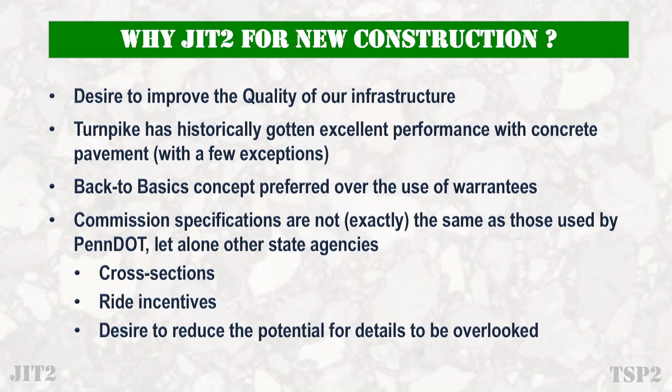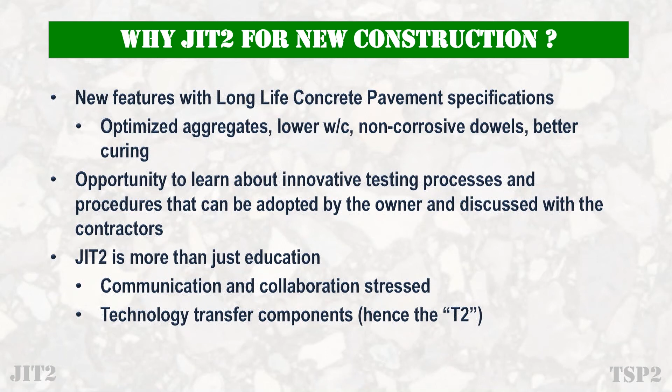Next, when the Pennsylvania Turnpike bid a new section of our Southern Beltway project that's located just south of Pittsburgh, we included a special provision for long life concrete. The Turnpike Commission felt that just-in-time training sessions provided an excellent opportunity to define the LLCP concept with all the contractor and inspection personnel involved. Topics such as concrete mixtures utilizing optimized aggregate gradations, the use of non-corrosive dowel bars, and lower water cement ratio factors, along with AASHTO T318 microwave testing to verify water cement ratios, were all new components to the long life concrete process.

First question that comes into play is whether the department, the Turnpike, wants to use just-in-time training. It's actually included in the contract when it is selected, and we have special provisions for both new construction and for pavement preservation. The special provision is included in the contract, and if the contract calls for just-in-time training, contractors bid that type of work, and they get reimbursed 75% when the first session is done and 25% when the last session is done. Special provisions stipulate that this training must be done within 1 month of when paving commences.

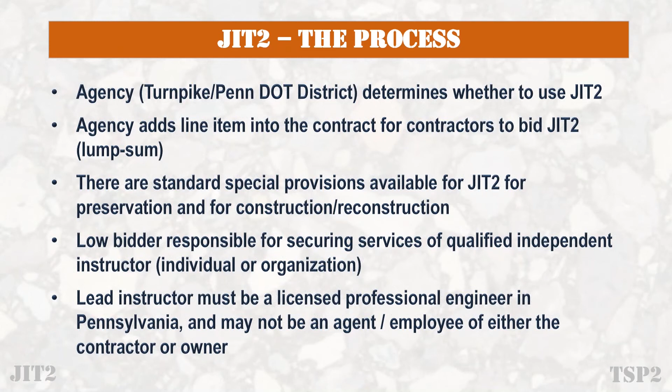The low bidder on the project is responsible for securing the services of a qualified independent instructor. This is not sole source type contracting, but the special provision does call for the lead instructor to be a licensed professional engineer in Pennsylvania and not an employee of either the contractor or owner or any of their consultants that are working specifically on that project.

For us to be successful in conducting a just-in-time training session, the first thing that we do once an agreement is reached is visit the contractor at their location. In most cases it's here in Pennsylvania, but we have gone out of state to sit down and talk with the contractor, find out what kind of operations they have, what their equipment is. Are they going to be paving with DBI, with a dowel bar inserter, or staked dowels? So we want to get as familiar as possible with the contractor, with their QC plans and how they plan on operating.

We also feel it's very important for us to physically go out to the project, to visit the project site and the concrete plant, because one of the things that we heard loud and clear from the owners is they do not want a cookie cutter type presentation. Now, obviously, the standards and specifications from project to project often are very similar, but there are some unique aspects for each of the different projects. The staging is different, MPT could be different, and so we do not have cookie cutter type presentations; it is mostly very project specific.

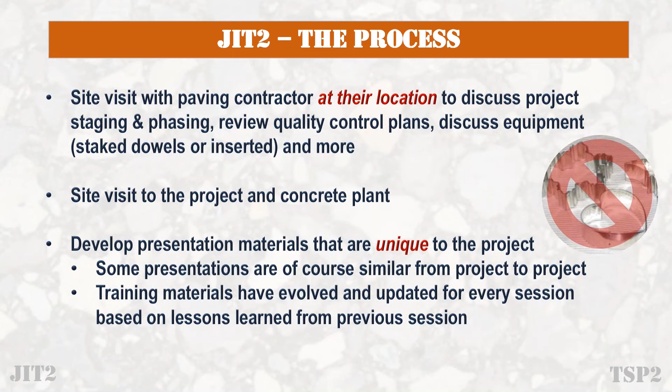One of the other contract stipulations is that the presentation, once we gather all that information, once we've met with the contractor, once we've met with the owner, we have to have the presentation in their hands 30 days in advance of when training takes place.

And one of the other rules is that the training has to be conducted within 5 miles of the project. Contractor is out of state, the training's got to be within proximity of the project. And the location of the training could be a hotel, fire hall, a house of worship, golf course, or a contractor's training room. And I spell all those out not as hypotheticals, because we've actually done training at each of those different locations.

The training for new construction is 6 to 8 hours. And because we've got a 6 to 8 hour training class, and because a lot of the training that we do is in very remote areas, we didn't want to lose the audience, have them go off for lunch, come back an hour and a half later. So we provide meals, we bring those on in.

And the real good thing that it does when we go that route, it allows for sidebarring to continue. There's people that are a little bit shy, timid about asking a question in front of 30 people. That usually offers the opportunity for those folks to ask some questions that they would not be comfortable asking in front of a large group.

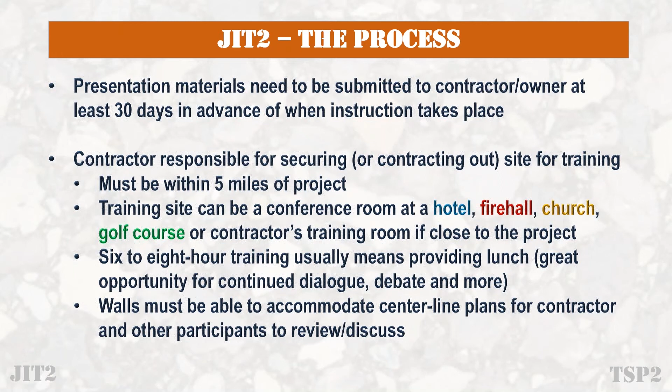And this is really a working type session, because these are project by project specific training. We've got the walls plastered with centerline plans, and we go through those, and the contractor explains how the project is going to get built.

Chris? Just-in-time training sessions are conducted prior to the start of any new construction or repair activities that are performed on the job site. The initial just-in-time training sessions range from an average of 6 to 8 hours in length and are held approximately 1 month prior to the start of work. A second 1 to 2 hour training session for follow-up issues is held generally a week or so prior to the start of the construction.

A just-in-time training session is then held as a conclusion once construction has begun, usually a week to 2 weeks after construction has initialized. And at that time, a review is done to determine what issues were encountered and if there are any ways we can improve the training for future sessions.

A wide variety of topics are covered in the training sessions, such as are noted on the slide: concrete paving basics, long life concrete paving concepts, best practices, quality control, project documentation and software protocol, and safety, which is always a paramount concern for all of our construction projects.

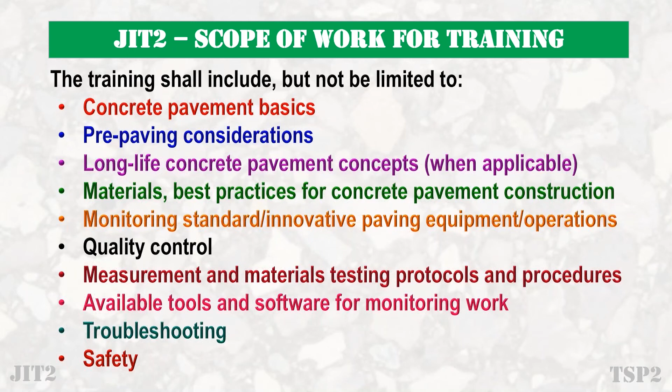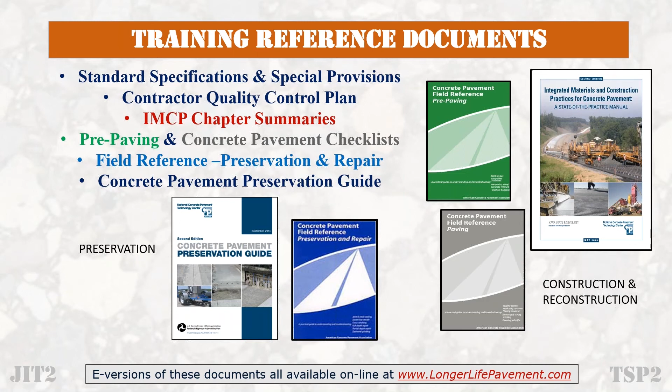I have a tendency, for those that do know me, to sometimes stray and go off on a tangent when we do the just-in-time training. One big rule is that regardless of what is said by the trainers, the contract documents rule. I mentioned the documents previously on the previous page. We provide those for all the attendees.

We also have in the handouts some key special provisions. For example, the Turnpike has a ride specification that differs from that of the department, and we talk about that. So we put those type documents in the manual. But again, the contract documents rule. Sometimes we've got new specifications that we know are coming down the road that aren't part of the contract, but they're getting implemented and incorporated into a special provision or into the new specifications

for a reason. A lot of times those are based on best practices, and we try to identify that this is not part of the contract, but it doesn't keep us from sharing with the audience best practices, either those that are used elsewhere in the state or from other locations across the country.

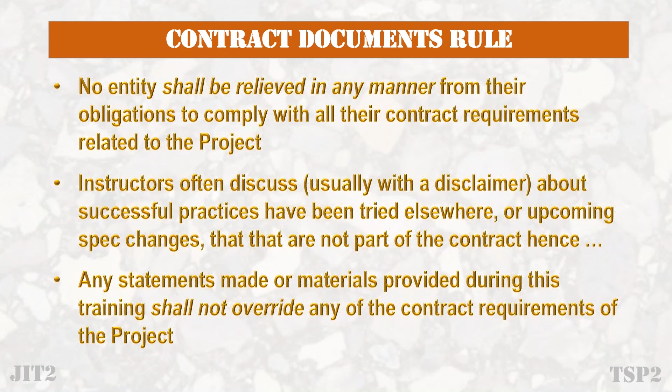The folks that participate in the just-in-time training, we typically have about 35 to 40 attendees. The entire work crew: the superintendent, the foreman, the finishers, the paver mechanic, the concrete plant technician. Those are usually all paving contractor. The paving contractor usually subs the work to a subcontractor, so we do have the sawing and sealing representatives also participate.

And you may ask, well, what's the purpose of having the material suppliers, the cement supplier, the concrete producers, the aggregate suppliers, etc.? They usually don't have the opportunity to be out on a project, but we all feel it was very important to have these people participate. They get to learn and know what it takes to put together a concrete pavement project. They also get an understanding of how time critical some of the delivery of the material is.

A lot of concrete paving is stop and start. There's a spurt of 3 or 4 days of paving and then 2 weeks of no paving. So it's real important for them to have a good feel and a good appreciation for what goes into building a project. The surveyors, people that are testing the equipment, testing materials, any other subcontractors and key people.

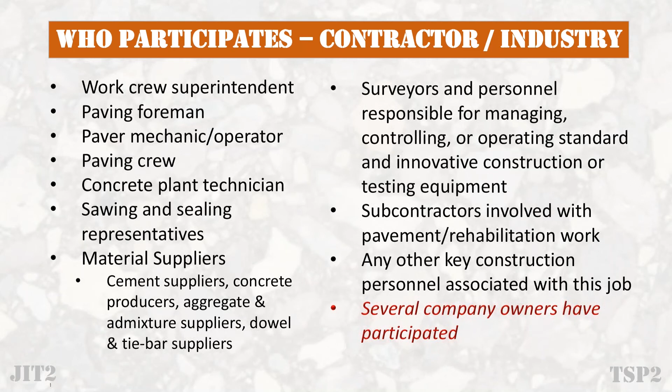And the buy-in that we're getting from the industry side, we've had several company owners participate for the entire session and also contribute and add their comments and observations. I think it's really important, by them showing that they're there and participating, it sends a strong message to their workforce that this is important and something that we need to take seriously. Chris? In order for the just-in-time training to be successful, participation by agency and Department of Transportation representatives

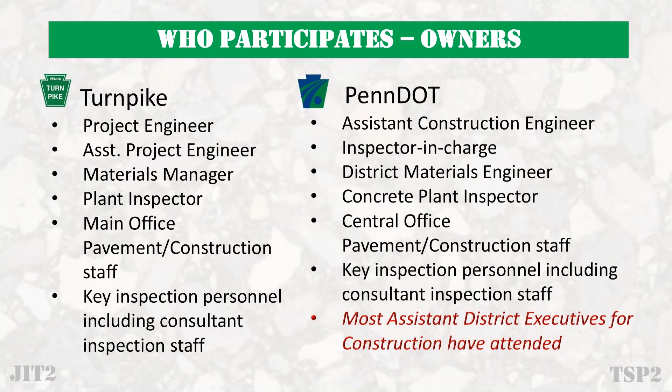is critical. Attendees from these organizations generally include project engineers and their assistants, materials managers, plant and field inspectors, key construction office staff, assistant construction engineers, head inspectors, district materials engineers, and construction and inspection personnel. You can see on this slide the wide variety of different organizations that have participated from the owners. We've got paving contractors obviously participating.

Some of our prime contractors do not do the paving, but because they are the ones that have the contract with the owner, they're participating in these sessions as well. You just go down the list, and these are some of the different companies that I just cited. One of the big things noted here is that we've got a really wide range of experience. We've got people that have probably forgotten more about concrete paving than I will ever know, to the other end where we've got people for whom this is their first or second time on a concrete pavement project and they don't have a comfort level.

So this is an opportunity to really start going through the basics, concrete pavement 101, so that they learn a little bit about concrete pavement. There's a lot of folks that are blue collar workers working real hard, and I think they make or break the work that gets done out in the field. They get the opportunity to understand not only what's in the specifications, but why we've got the specifications written the

way they are. One of the other things that's real important is that in the training, we've got the people that are going to be doing the work actually participating. An example I've got is we had a bonded concrete overlay project where we had the company owners, and we had some of the workforce that was out there.

We got the training, but the only person that didn't participate in the training was the head sawing subcontractor. And by luck, we happened to be out there on the project the very first day that they were doing paving, and we got into an interesting conversation. You know, when you do a bonded concrete overlay over concrete, you've got to saw cut your joints full depth. He was sharing with us that he had 40 years of experience: you cut your joints D over 3. Well, if we didn't have that conversation out there, we would have had a failed overlay project and gotten a black eye in the eyes of the owners.

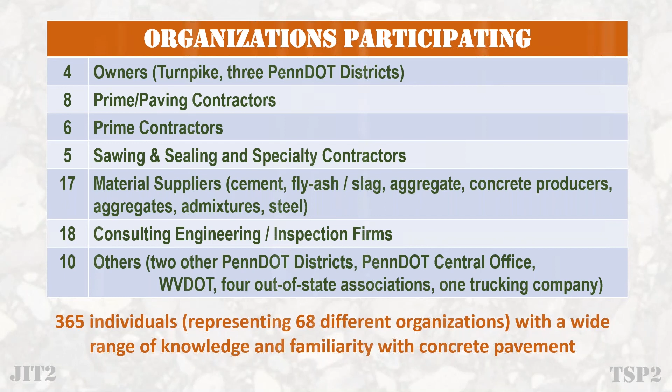We mentioned this. All the experience that we've had with just-in-time training has been predominantly with new construction. As Chris has mentioned, 6 long life concrete pavement projects on the turnpike. We've had just-in-time training for those. The Department has embraced the concept of just-in-time training, and we've used those on 3 projects. We've got a district that is putting down the first composite pavement in the Commonwealth with concrete pavement, 9 inches, covered with 5 inches of asphalt material.

They felt it was important to have training not only for the concrete pavement component, but for the asphalt pavement component. And we had 2 separate sessions there because you've got a different workforce doing the concrete paving, another workforce doing the asphalt paving. We did have some overlap so that there was some consistency, and so that the same people that heard what was presented in the concrete pavement session also heard the same on the asphalt side.

A real unique project. It doesn't have to be just for new construction. In downtown or very close to downtown Philadelphia, they embedded rails for their trolley system. And that was really a very interesting project, very untypical from all the other type work that all the other just-in-time training sessions have had.

Very unique. Finally, before the just-in-time training special provisions were approved by the department, there was a project that was advertised, and the local district felt that they really wanted just-in-time training. They didn't have the opportunity to put it into the contract. So they were a believer in just-in-time training. They work ordered it on in. And taking it one notch further, when the prime contractor who was going to do the paving decided to sub that work out to another subcontractor, the district decided that we needed to do the just-in-time training for that new paving subcontractor as well.

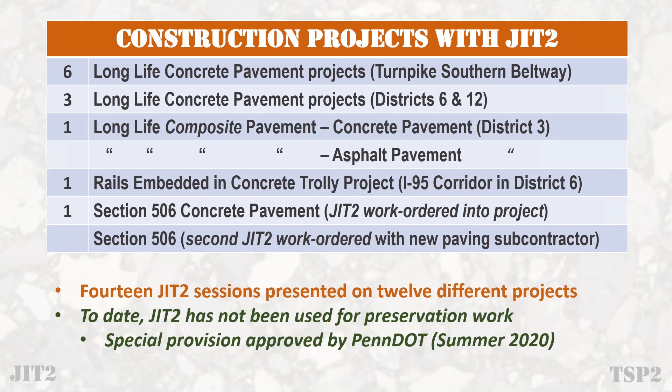As I mentioned, we haven't used just-in-time training yet for pavement preservation work. PennDOT has put together a special provision specific for the CPR side. So Chris, how can just-in-time training benefit concrete preservation contracts? It provides the opportunity to review partial depth repair procedures, joint sealing and resealing techniques, new practices for full depth corner repairs, and partial width full depth repairs.

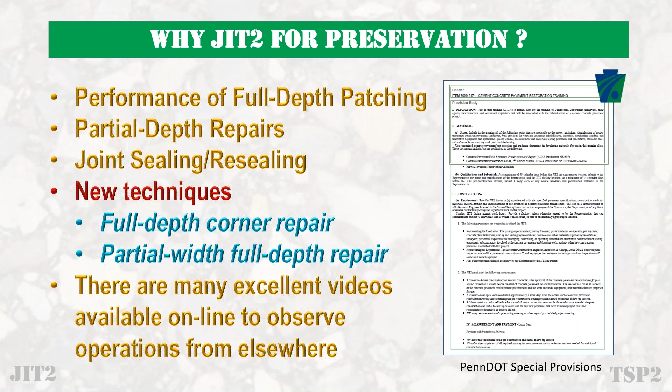YouTube and other internet sites can provide valuable training videos, but their information isn't job specific. Videos don't convey the owner's expectations. Videos are not able to provide collaboration between owner, contractor, management, and inspection staff. Videos do not identify problems, nor can they resolve them. And videos can't build a sense of trust and partnership that is key to a successful project outcome for all involved.

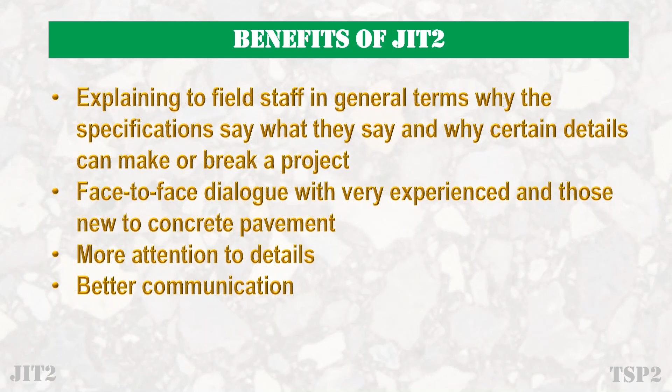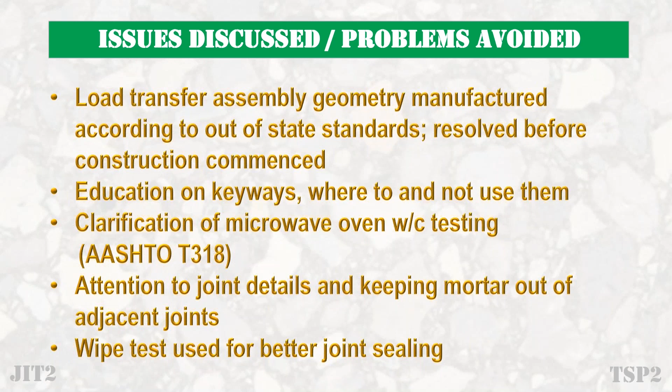Just-in-time training provides the opportunity to review specifications, focusing upon how they impact the outcome of the final project/product. The face-to-face dialogue allows personnel with varying degrees of experience to interact and better understand their individual role in the overall project. The importance of paying attention to the details and good communication is stressed. Topics such as the proper placement of load transfer assemblies, material acceptance testing protocols, the use of keyways, tie bar placement, AASHTO T318 sampling and acceptance for water cement ratio, sawing and preparation of joints for sealing can help reduce construction and placement issues on the job site.

Well, obviously, we're working in different times, and I'm not sure what the times are going to be like moving forward, because we do our presentations and our just-in-time training now virtually. We have cut back from doing a 6 to 8 hour session to a 4-hour session. That's probably the limit that most folks have to be able to sit and go through a presentation. We've not lost anything with respect to attendance for these sessions once they've gone remote. But the one thing that I really miss is the face-to-face contact. You go out and you do a presentation, you've got 30 or 40 people when something is presented, and sometimes we actually try to stir things up a little bit to get the dialogue going.

Now we can't read the body language, and a lot of times the people that don't seem like they're agreeing with what's being said, they've got some valuable points to make, and it gives us the opportunity to call on them and to get them engaged.

Now there are always going to be, I call them the prisoners, the people that are there because the boss says you've got to be there, and we really can't do much about that. But there are still people that may not want to be there, but they're there. We take it to the next step. And one of the things that we do when we complete the training is we want to get feedback from the folks that have participated.

Now, 106 out of 365, that's a 29% participation rate, not as good as what we saw in the recent presidential election. We did ask the audience whether they thought just-in-time training will improve the likelihood of a quality project. And that's what we're all about here, we're wanting to get a good product. And 96% of the attendees said, yes, it will improve the quality. 4% were on the fence. We didn't have any dissenting opinions.

This ties in with improving the likelihood of a quality project. I think it ties in because the communication, the collaboration is very key, and we saw the same response. Now, the third item that I've got here is one that I get a little bit of satisfaction on when we finish a just-in-time training class. We got 89% of the people that feel that once they left, they know more about concrete. They think they're going to be doing a better job. 89% agree. 11% were also on the fence.

And then finally, we asked the question, should just-in-time training be considered for other projects? And yeah, we had one dissenting vote. And interestingly, the individual that said we shouldn't consider just-in-time training for other projects is in the green category in terms of he felt that just-in-time training is going to help him do a better job. It's going to improve communications, and it will improve the likelihood of a quality project. So we weren't able to find out why he didn't think we should be continuing that. But nevertheless, that's the feedback that we had gotten.

Chris? Presently, it's hard to quantify the long-term benefits of the just-in-time training. The Pennsylvania Turnpike is convinced just-in-time training will deliver a better quality project, as we have used it on all of our Southern Beltway contracts. PennDOT has developed a just-in-time training component for concrete preservation work, building upon the benefits of proactive training.

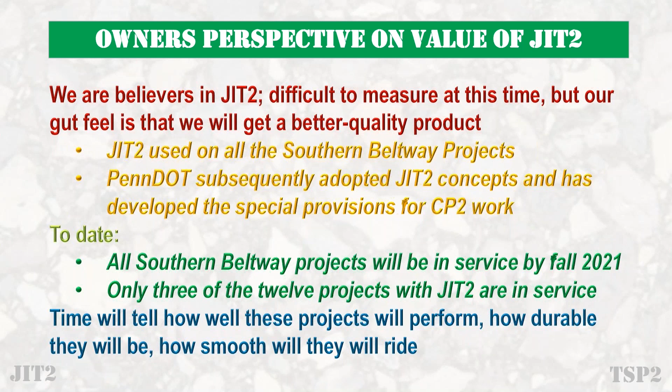To date, all of our Southern Beltway projects will be in service by the fall of 2021, and presently only 3 of the 12 projects with the just-in-time training are in service. And as stated a moment ago, in time we will know the fruits of our efforts with just-in-time training. Thank you. All right, that concludes our presentation.

I just wanted to comment and first of all, thank the Turnpike. They were very instrumental in getting this just-in-time training implemented and incorporated. PennDOT, the Department of Transportation, quickly embraced the concept, and I want to thank the department as well. They see the value in having just-in-time training for CPR work.

We have had projects where we have had premature failure, for example, on patching work, where the workforce and the inspector both didn't understand why we absolutely need to make sure our dowel bars are completely encapsulated in either epoxy or in grout. The lack of knowledge by folks that worked on some of these projects resulted in us not having a good performing CPR repair project.

So I think there's a lot of folks out there that believe that we are going to get a better quality product. And I think the other part is the whole communication and collaboration aspect. This isn't partnering, but it certainly has got a strong partnering flavor to it.